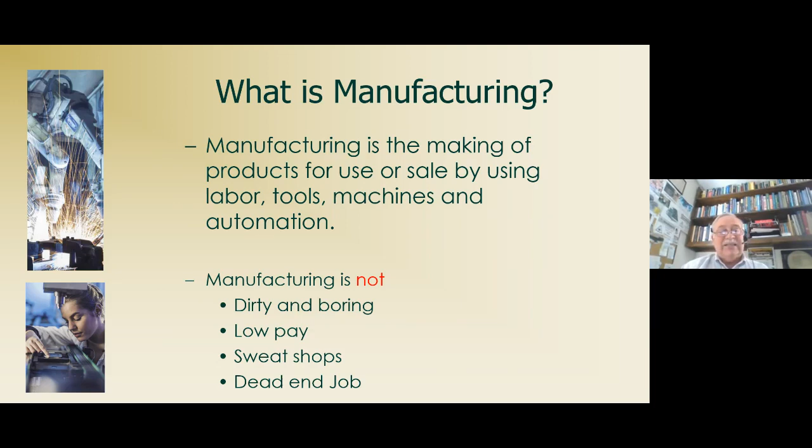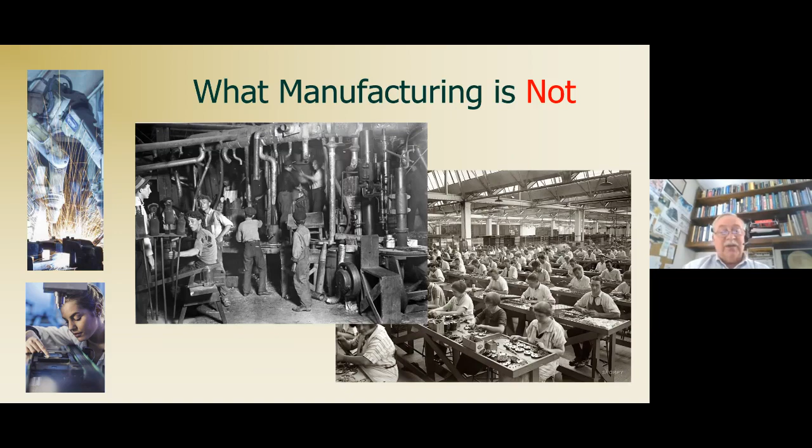You'll have a chance to try them, a chance to work with them. No, you will not be an expert at any of them, but you will know what they do and how they work, and be able to advise your company and help them deploy that type of technology.

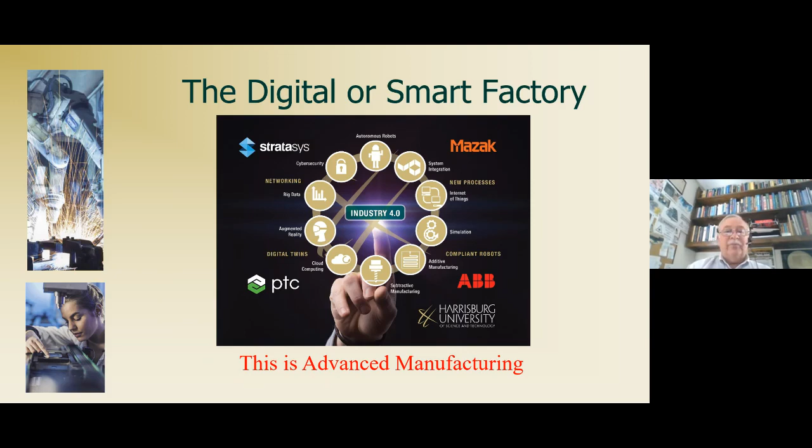Between these four and about 20 other companies, they have donated $1.6 million to our cause in materials, software, and equipment. They're all supporting it. Now, manufacturing is a complex opportunity that you can get into.

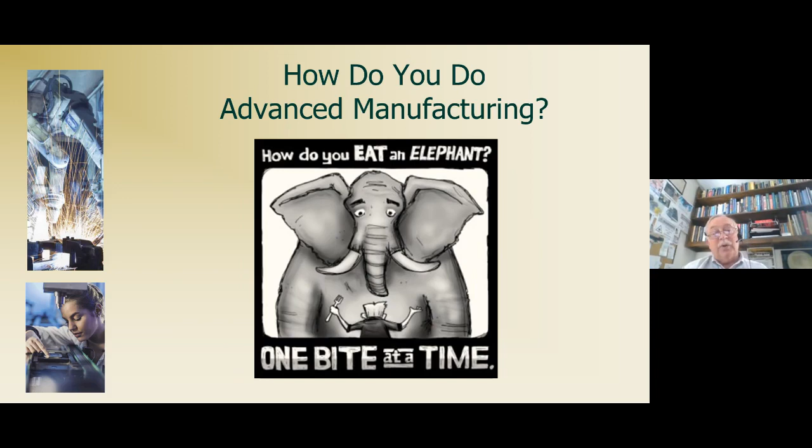This particular cartoon means a lot to me, because if you sat down and tried to put an elephant in your mouth and eat it all at one time, it's not going to work. But if you take a fork and break it up, you can eat it eventually, you can get it done. Manufacturing is the same way. Learning the technology, learning the systems, it's all piece by piece, which is the way we deliver it. Then we give you hands-on experience with it, and then you put it together.

Now, manufacturing production technicians, the only reason that's up there, if you've had a chance to read it, that's good, but it basically tells you what the government believes you'll be doing. You'll be setting up, testing, and adjusting manufacturing automation.

Machinery and equipment using a combination of electrical, electronics, mechanical, hydraulic, pneumatic, and computer technologies. A lot of big words, but believe it or not, everything in that sentence is going to be covered in our major.

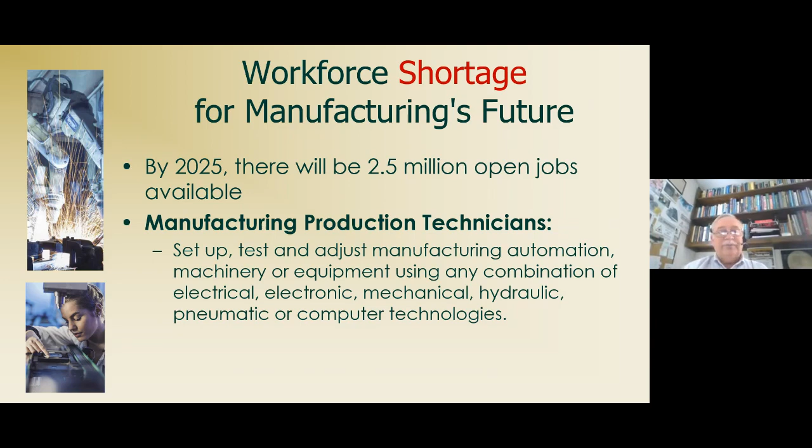Basically, what it comes down to is an engineer is a person willing to sit at their desk and do a lot of math to figure stuff out, and a technologist is a person who uses technology to solve problems. Yes, you may end up doing some math or programming, but 90% of it's going to be hands-on, working with the machines and the tools.

One of the pieces of equipment coming in is the laser. The laser cutter we're getting is going to be capable of cutting about half-inch steel, and if you think about that, that's a pretty good laser.

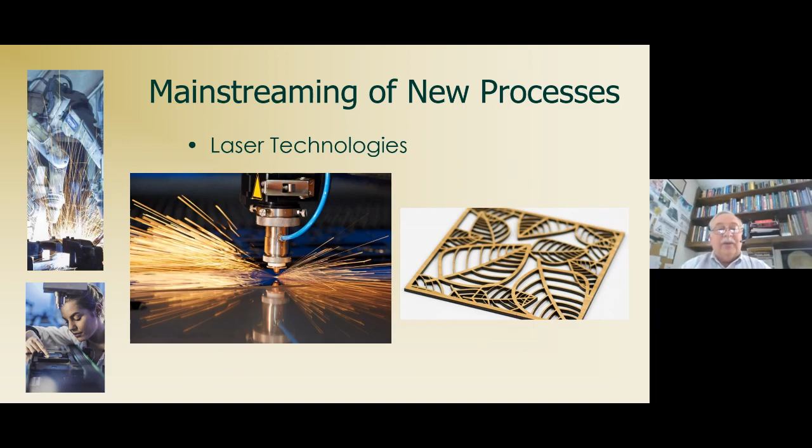We also have coming in a water knife. It uses 30,000 pounds of pressure and some abrasive to cut through metals. The neat thing about this one is that when you cut through these metals with that abrasive, it's clean—you don't have to do any finishing of the surfaces. The only bad thing about this process is if you manage to get your finger in there and get it cut, you'll bleed just like a regular cut.

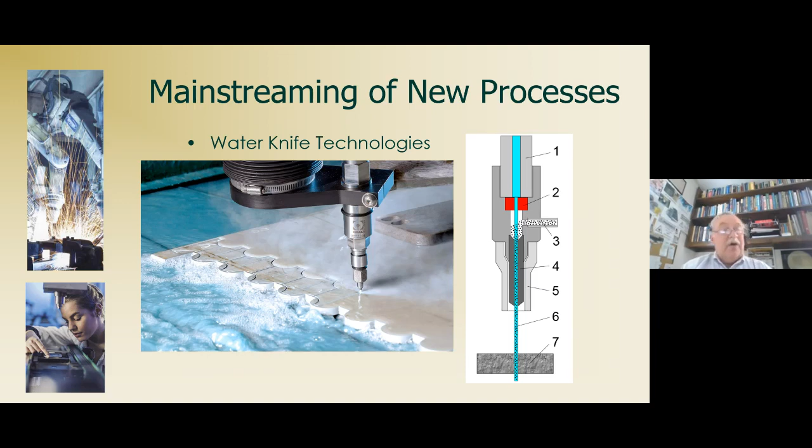Now, if you do the same thing on the laser while you're using it, it cauterizes, so it won't bleed. So you've got to pick your tools as you need them.

This has been adopted, and it's even in the automotive industry. It's coming online—you will be doing this process.

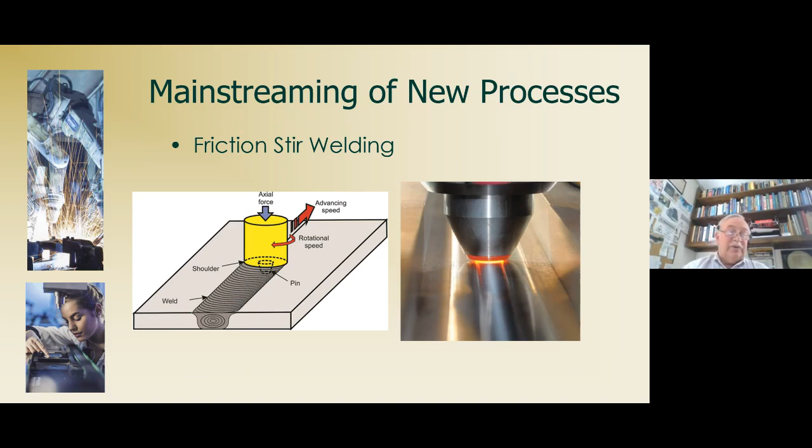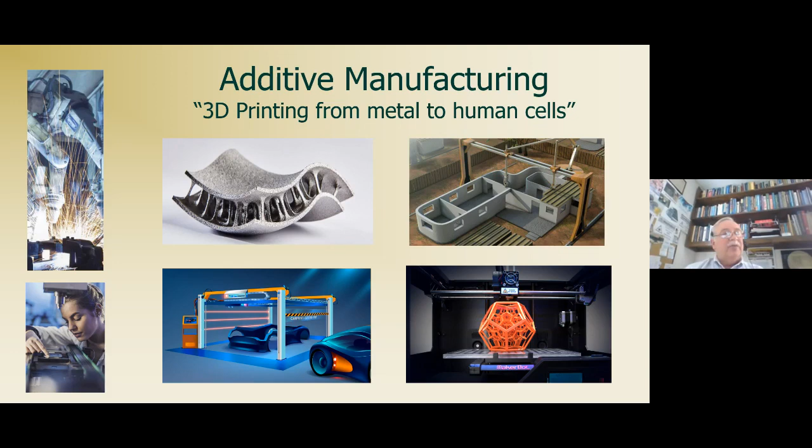And if you stop and think about it, they're building this stuff, but they don't have anybody to run it. That's where you come in.

Now, there's a lot of systems I've talked about, and one of the quotes I really like is from Shrek, that onions have layers and ogres have layers. Do you get it? When he was talking to Donkey? The reason I like that one is all the automation we talk about, all the automated machines, they all have layers, and if you start with the beginning layers and work yourself through, you'll be fine.

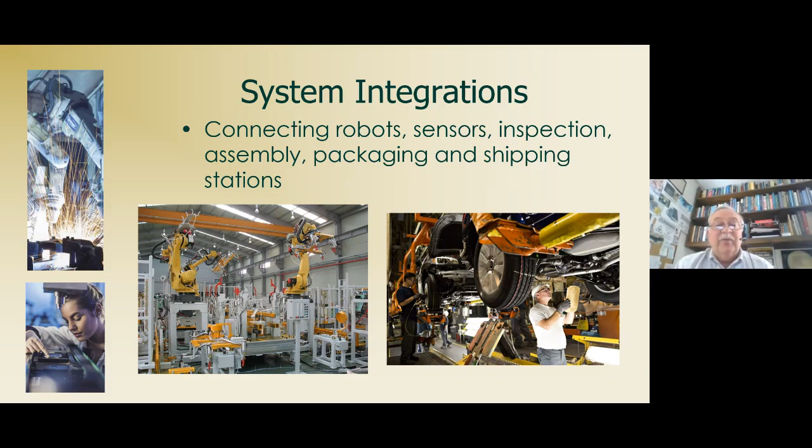The picture on the right with a gentleman underneath a car — I think it's a car, maybe a pickup, we don't know, but it appears to be a car. One of the things you've got to realize is that as you're working with automation, not only do you have to work with the machines, but you may have to work with humans too, because I don't think humans are going to go out of the manufacturing process at all. They may go out of some parts of it, but most of the time they're still going to be in the cycle. So you've got to remember the human factor when you're working on that.

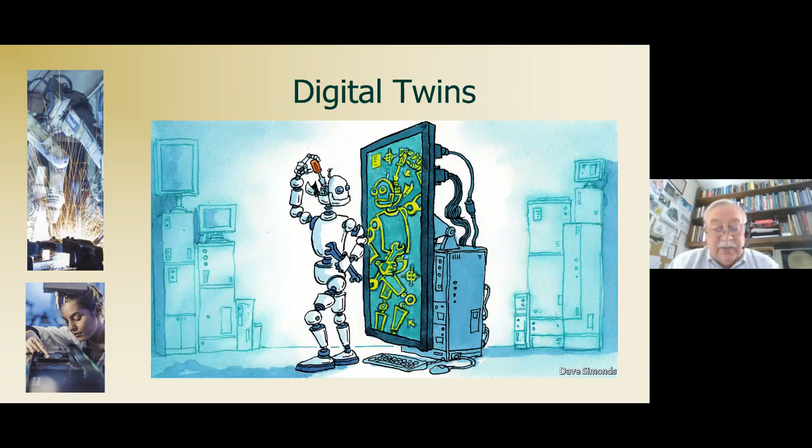Digital twins. This is something that's very, very important, and it's coming online — I shouldn't say coming online, it is online for a lot of major companies. Basically, you see a robot there that's looking into a tablet, trying to fix something. Somebody told him he had a screw loose, that's the reason he's trying to fix his head. This is real time today. It exists, and they need people to work it.

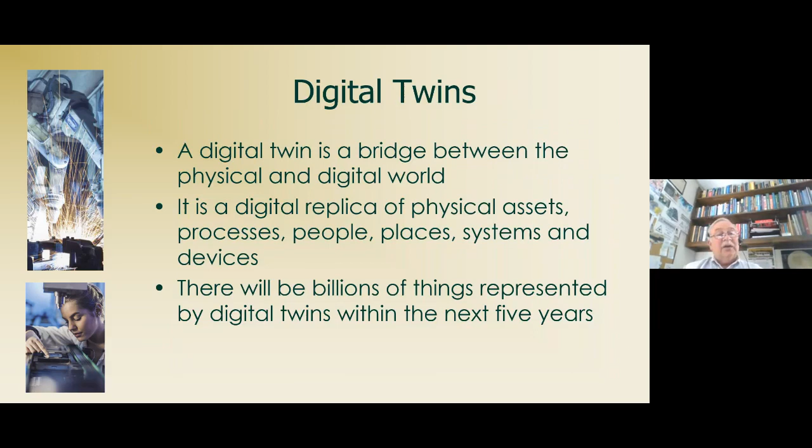Now, a digital twin is a bridge between the physical world and the digital world. It's basically you take a CAD drawing — I'm going to show you. I'll go ahead and switch to it now.

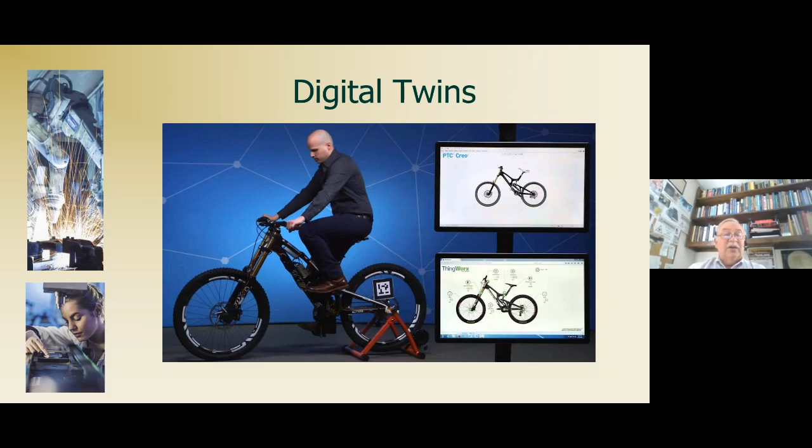The same things are going on for training, and also for servicing items that are coming out of manufacturing.

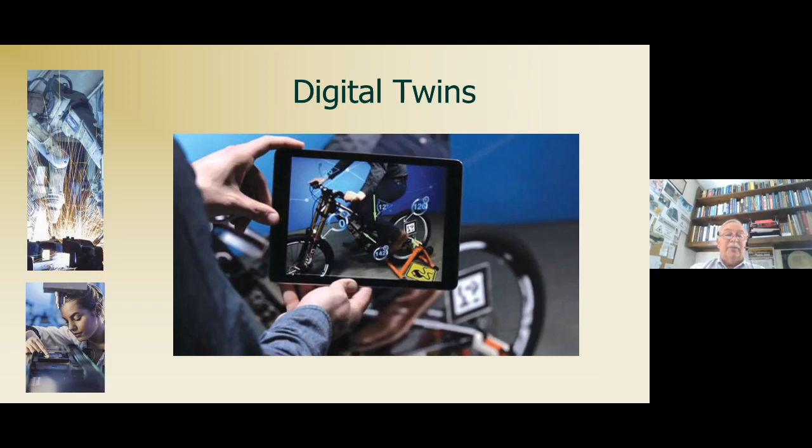A little quick story on this: when I was down at Johnson Space Center in 1995 — no, 1998 — they were going through and cutting what's called the bulkhead for the X-38, and it was a piece of aluminum about 1.5 feet thick, about 8 foot wide, and about 12 foot long. They had spent 4 days cutting this out.

It had to be in one piece because it was a spaceship. They got down the last 4 or 5 hours, and the cutting tool took off and went to the side of it and destroyed it. They lost $250,000.

Well, of course, the next day, Frank Benz, who was the head of JSC, came to our office area, and he took us all to the meeting room, and we all sat down. After he settled down, he said, 'Why didn't we see this coming?'

And the programmer says, 'Well, we couldn't see it. We did what we were supposed to do, and the code said it was okay.' And he asked again, 'Why can't we see it?' And so I raised my hand, and at that point in time, I got a lot of glares.

But I told him, 'I brought 2 students down here with virtual simulation, and I can simulate that, and I can show you exactly where it is and how it was going to affect it.' And he says, 'How long? Is it going to be weeks?' And I said, 'No, give me a day.'

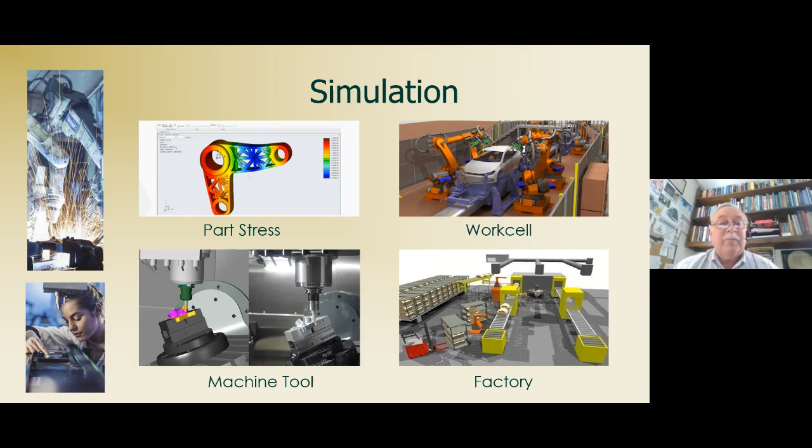Those guys used to follow wires in the floor, and now they no longer do that because if they got behind something on a wire and they couldn't move, they were stuck. Nowadays, they go by GPS, which means that if they get stuck, they let the computer know that they're stuck. The computer figures out where to send them, and they work around the outage. That's how advanced the technology is.

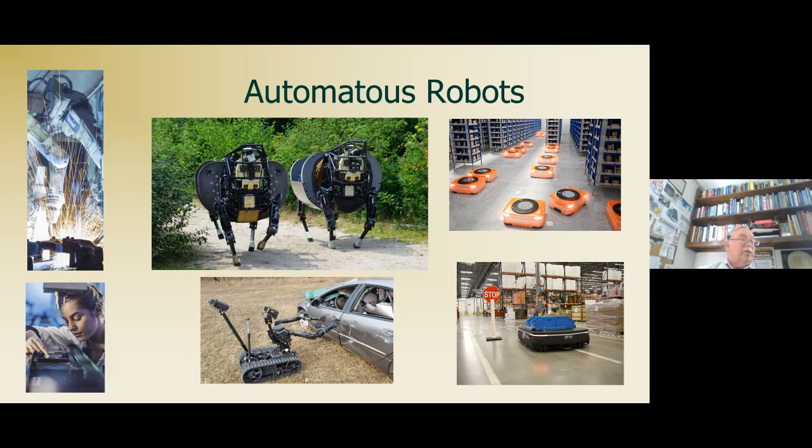The bottom left-hand corner is an autonomous robot that goes in and takes a look for bombs. And of course, that's just another use of the autonomous robots.

Basically, a compliant robot you can sit with, and you can work with that robot. And when you're done working with that robot, or it gets in your way, you can shove it out of the way, and it will wait for you to be done, and then it'll come back and finish its work. So that robot can't hurt you. A regular robot can, that one can't.

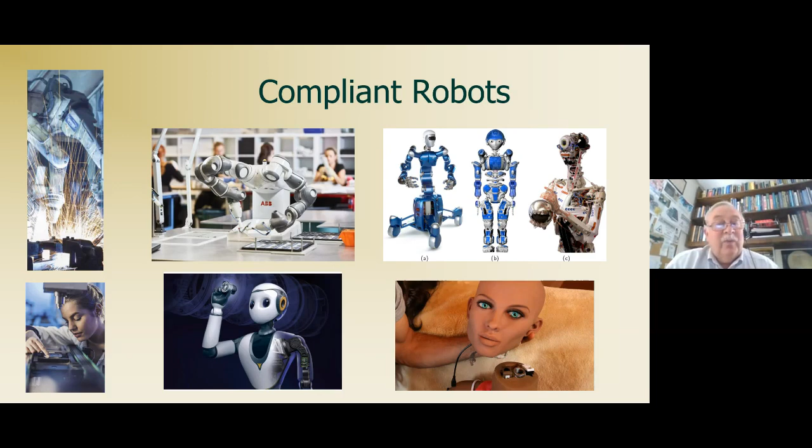So you may, in your lifetime, I will bet that you will be working around a production line with robots that look like humans. I fully believe that. The other thing we talked about was the Internet of Things, IoT, the information that gets added to these drawings to make them real.

Any device that you have Wi-Fi enabled, any device that's plugged into a 110-volt line in your household, a regular plug, whether it be a microwave, a washer, a dishwasher, a dryer, your TV, your computers, your tablets, your phones, all use that communications. All that communications is collected, whether it's voice, whether it's text, whether it's video, it's all collected.

And it goes back to either one or two places. It goes back to the manufacturer itself, or it goes back to the government, and the government collects that information. And so that's how they track threats.

And basically, it all goes down to Dallas-Fort Worth, and the guy that made the database, I have met and worked with. So is it true? Yes, it's true. In the digital world, you do not have privacy, and just keep that in mind.

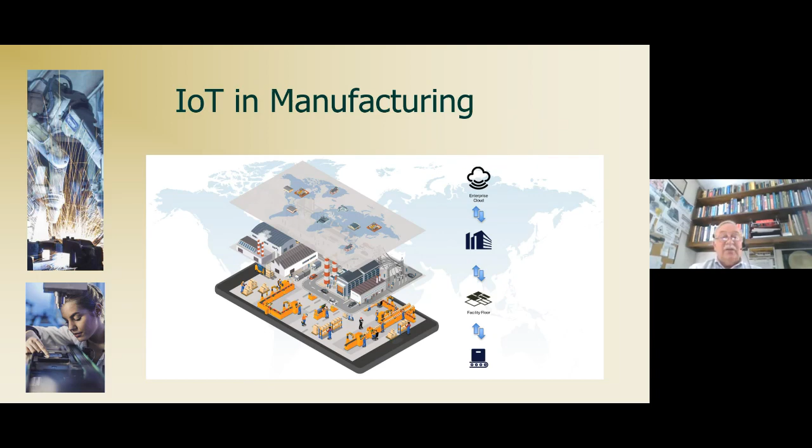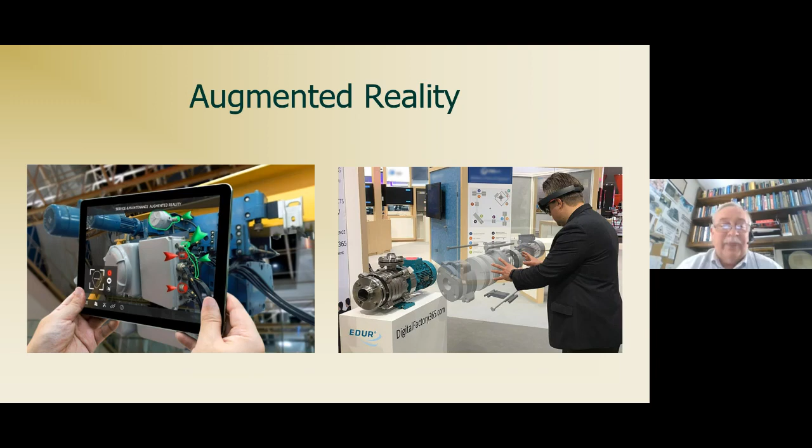Now, the big thing is the IoT, the Internet of Things. Its future is bringing the physical world back into the digital world, and the augmented reality's job is to bring the data from the digital world back into the physical world. So both of them are married together, and both are very, very important. We do have a full semester's class on that.

Cloud-based technology—everything's going to the cloud. You hear that every day. There are different clouds and different rates of clouds: public clouds and private clouds. We will deal mostly with the public type clouds.

Integrated product design—you'll be working with people around the world, or can be working with people around the world, on the same project at the same time. The technology is here, it's being used.

There's also quality assurance going on, whether you're trying to keep stuff that has been manufactured or it's just getting ready to be manufactured. You've got to check the quality on the stuff, because if you have poor quality coming in, you get poor quality going out.

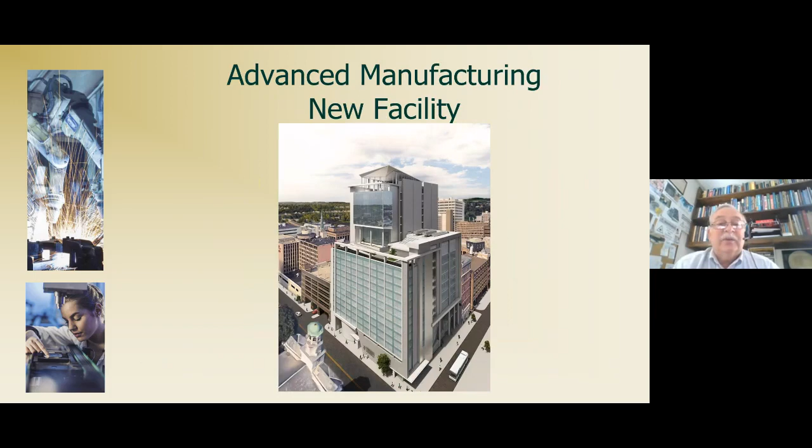You make those decisions. This is the new building that's being built. The neat thing about it is our program is going to occupy 3 floors of the 17-story building, about 13,000 square feet. It is an investment of $40 million in this program. That means you're amongst the first to come through and experience it.

Of that $40 million, $10.2 million of it is machines. Everything that we do is state of the art. Everything will never get more than 3 years out of date. If by chance something in the curriculum changes and we need to take a technology out and put a new one in, I can do that within a month. Everything is modular, so we'll be able to take care of that.

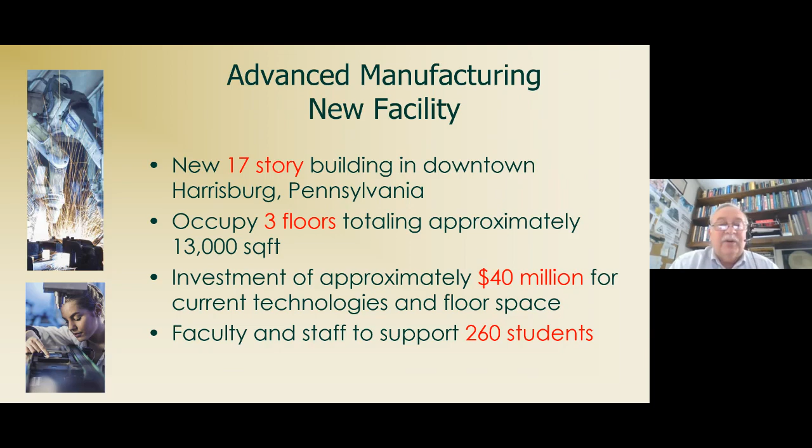We're looking at supporting about 260 students. I'm hoping for 220, 240, but I think we're going to go to 260 on that. So there's going to be quite a few of you.

The other side of the coin is that right now, in Harrisburg and right around Harrisburg, I have 60 jobs waiting for graduates. They've already been committed to. On the national level, there's another 150 up there.

There's NASA in there, which I still have ties back into, and there's Sandia Labs. Sandia Labs offered to fly 30 people down for an internship, house them, feed them, and fly them back after a semester. They would have worked for the government and been able to work for them.

The only problem I have with it is what you do at Sandia Labs, they typically don't tell people about. So I may not know exactly what you were working on down there, but they're looking for people. They want 30 people alone.

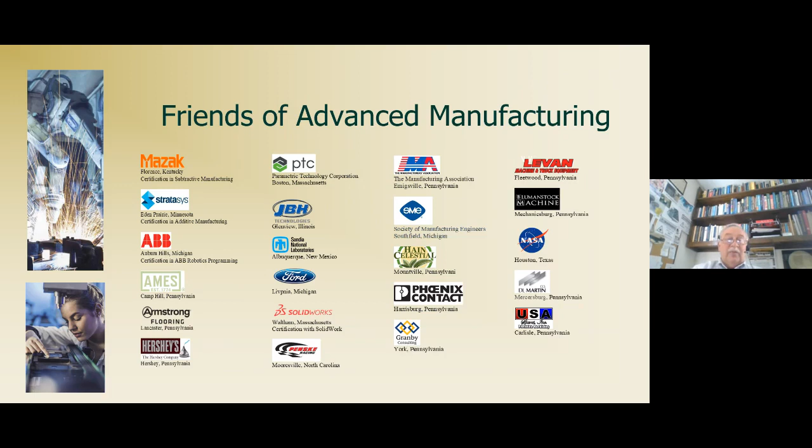Keep in mind that we are the first program in the United States of this type that is comprehensive, and we're one of 6 in the world — probably the most comprehensive of the 6. Remember, when you leave here, you're not going to go looking for a job. You're going to end up having jobs come to you.